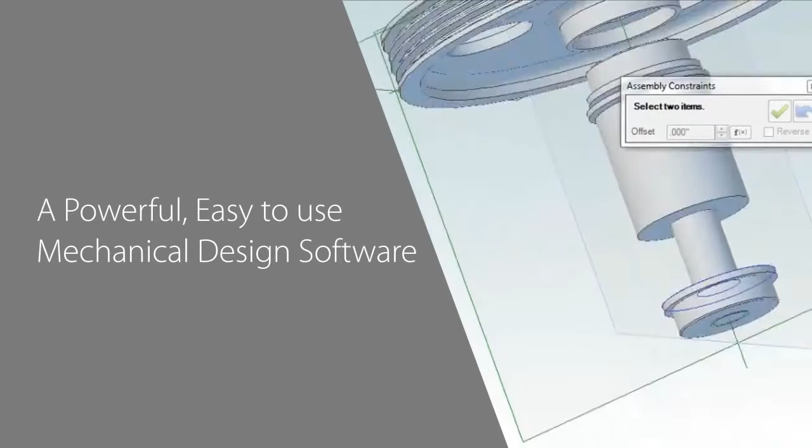Geomagic Design gives designers and engineers a powerful, easy-to-use mechanical design software to make amazing products. In this video, you'll see how this professional CAD software from 3D Systems lets you create, assemble, validate, document, and render designs for 3D printing and every other manufacturing method.

Let's take a look at how easy Geomagic Design is to use, even when handling data from large and complex products, like this 3D Systems ProJet 3D printer. Our ProJet printers have thousands of parts, and in this example we'll be working specifically on the pulley assembly that controls the motion of the printer's build platform.

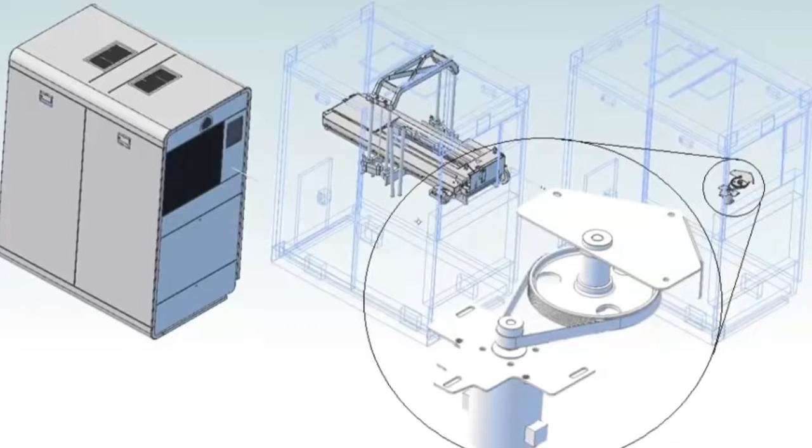Let's start by designing the pulley wheel. Most design begins with a sketch, and Geomagic Design's sketching tools are awesome. As we place entities, we can constrain dimensions and relationships to other entities on the fly rather than add them in later.

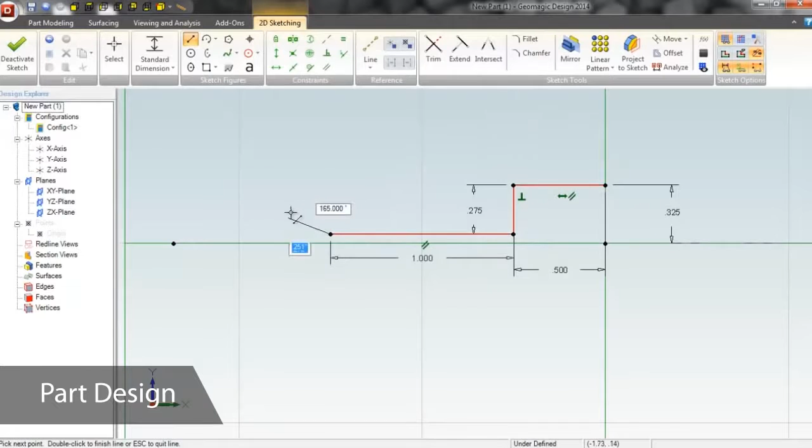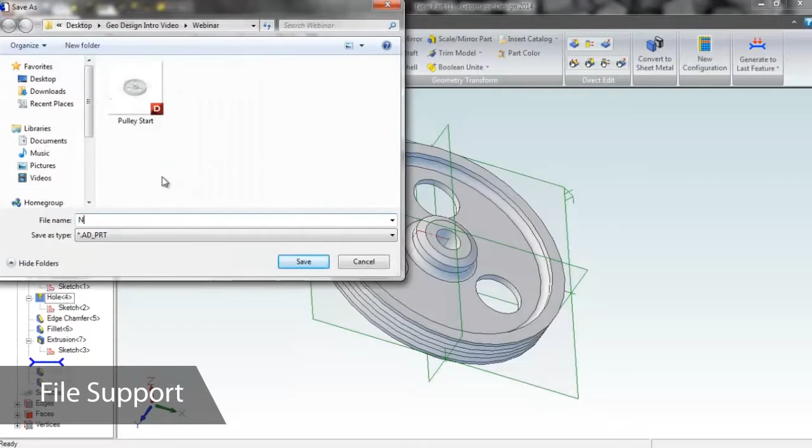Contextual menus predict what you'll need at each step, making the design process faster. We'll revolve this sketch around a central axis to create the wheel as a solid body. Once we've added finishing touches like fillets, chamfers, and patterned holes, we can send the part to the assembly module to begin to build a functional virtual model.

We designed our own wheel, but Geomagic Design provides access to part libraries featuring millions of standard parts, so we could have also used something off the shelf.

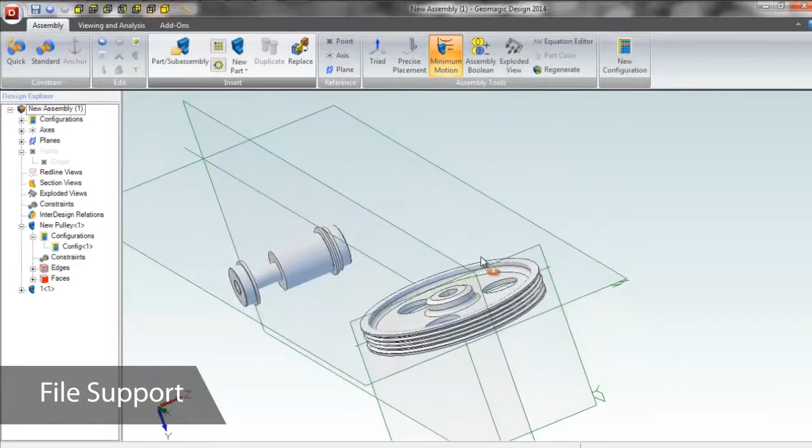Now let's add another part to this assembly by importing it. Geomagic Design can import almost any CAD file, whether standard or proprietary format, so incorporating parts from almost anywhere into your designs is easy. The software can also directly edit features on any imported solid, so let's change the radius of this hub that was created in another CAD package.

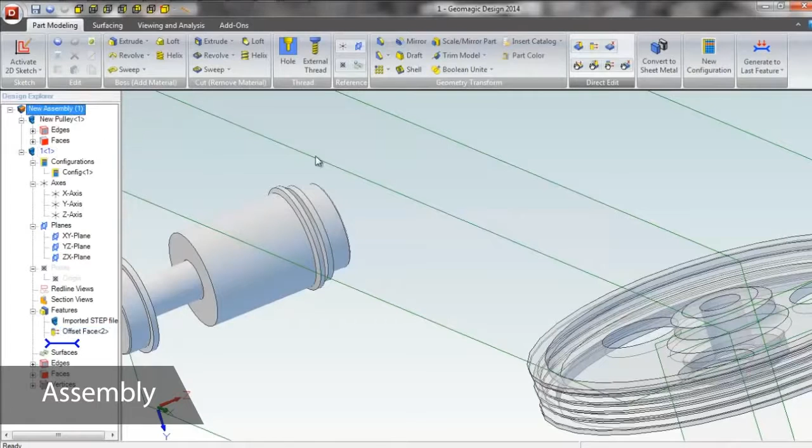Assembly constraints are extremely intuitive. For this hub, all we have to do is select the two faces or reference geometries, and Geomagic Design's Quick Align tool completes the alignment automatically, and then keeps us in the tool to select the next alignment type.

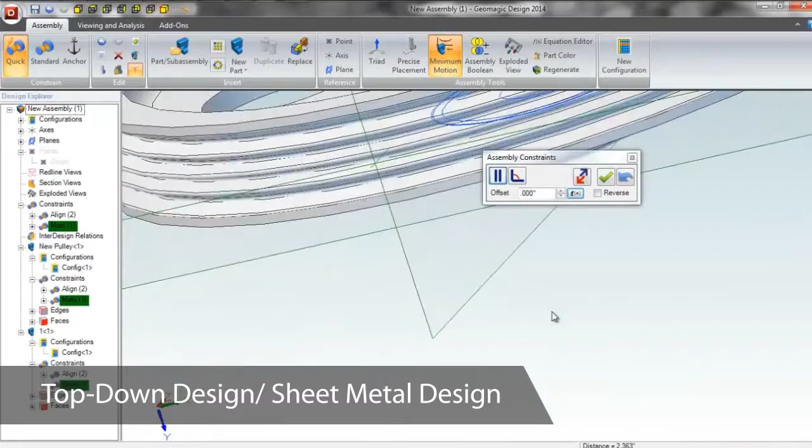If you want to use an assembled file to guide the creation of new parts, Geomagic Design supports top-down design. We'll add a new sheet metal part into this assembly and use geometries from the existing bodies to help place it.

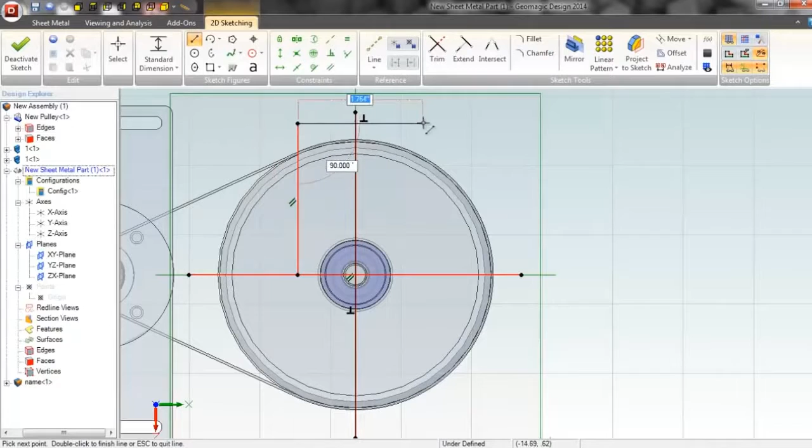Since everything is history-based, it's easy to go back in and edit objects to add features or edit dimensions manually, or use the Design Dimensions option to bring back any dimensions we used when creating the file.

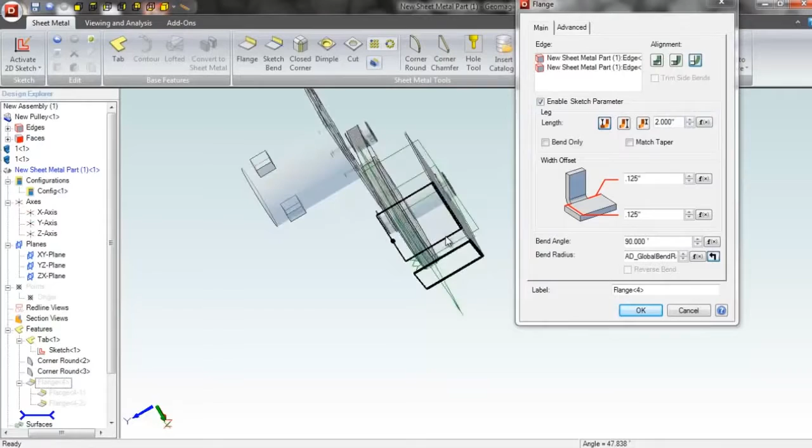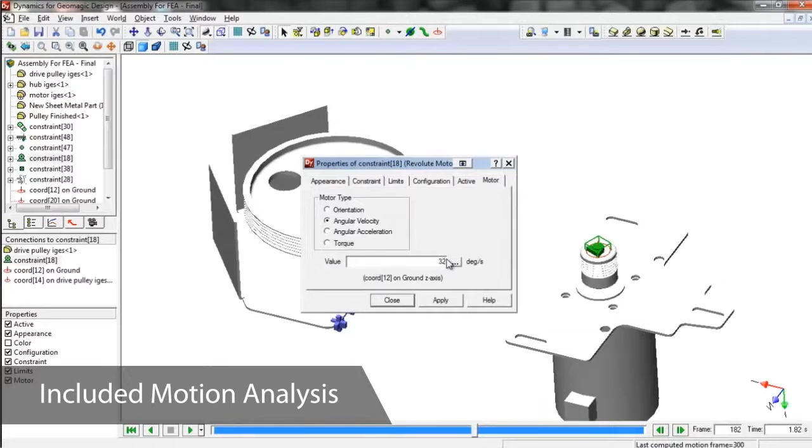To confirm that our pulley assembly will perform correctly, we can use Dynamics for Geomagic Design, a motion analysis module included with the software. All of our assembly constraints carry over from the assembly, so we don't need to recreate them. In Dynamics, we can add motors and joints, watch how the assembly will function, and analyze acceleration and interferences before we make our first prototype.

Once our new part is finished, we can go back to editing the assembly and save the new part.

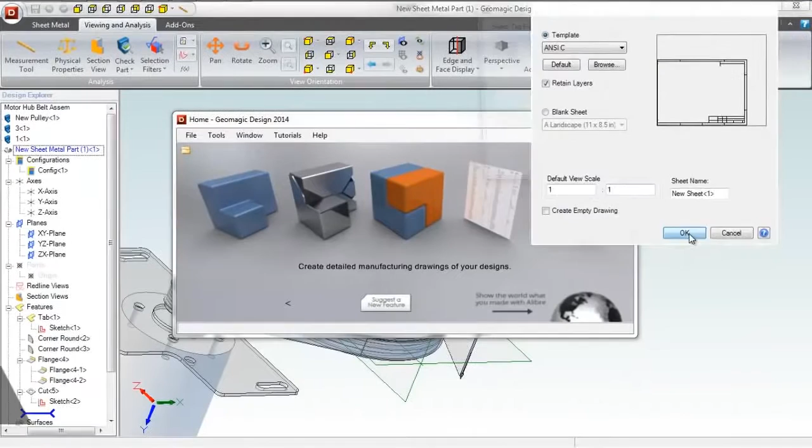Geomagic Design can link the parts we've created to an engineering drawing to document it for manufacture. It's easy to select drawing templates and add standard views. If it's a sheet metal part, like this, we can add a flat pattern view to see how the object looks before it hits the metal press.

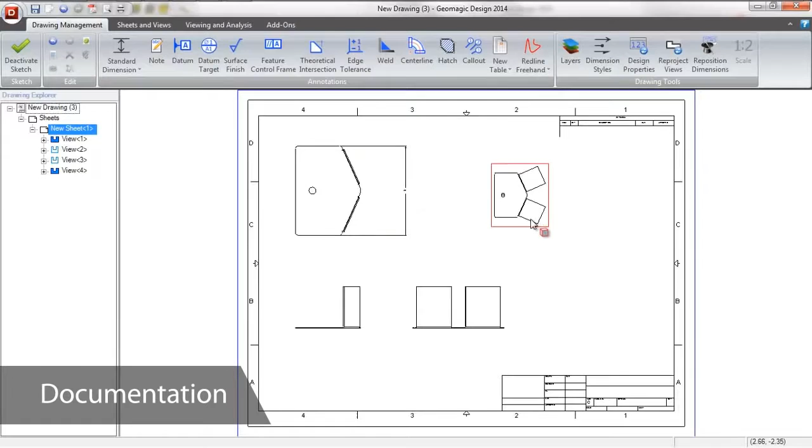This view can also be exported as a .dwg or DXF file to send directly to a laser cutter or plasma table. Datums, dimensions, GD&T callouts, and other annotations can be added to the document simply by selecting the edge they apply to. The best part of this is that the drawing is dynamically linked to the model, meaning that as parts evolve in the iterative design process, the document updates in the background to reflect any changes made.

Now that we have a finished working model, Geomagic Design gives us the option to save as a KeyShot file so we can apply photorealistic rendering to add materials, scenes, and lighting for that finishing touch.

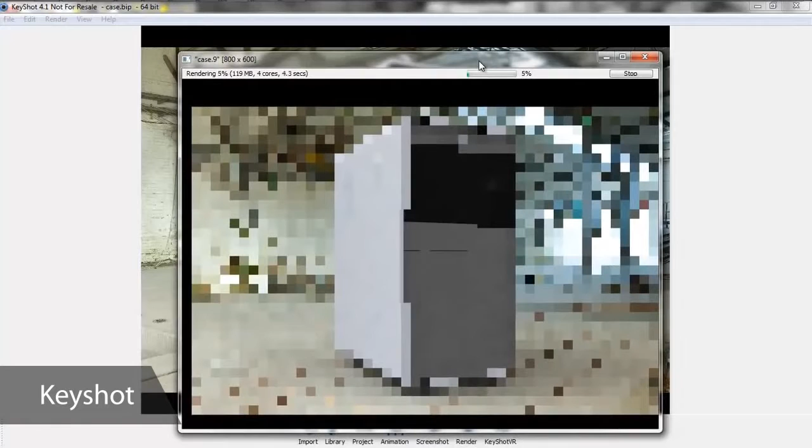Since Geomagic Design is made by 3D Systems, printing your designs as prototypes or end-use parts is easy. Exporting print-ready models takes just a few clicks. No matter what you're making or how you're making it, Geomagic Design is the easy-to-use, powerful mechanical CAD software that will help you make amazing products.